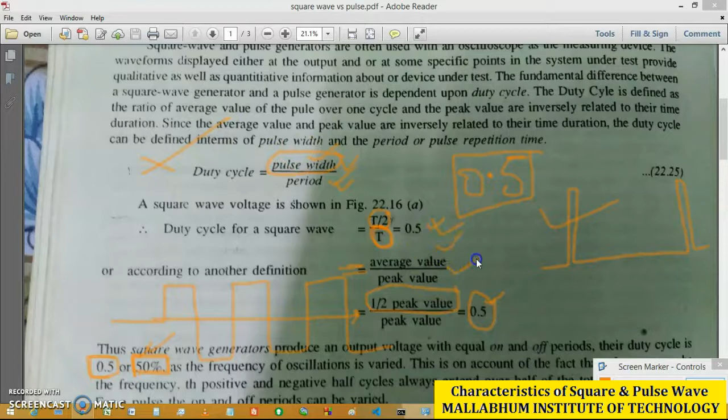So the foremost thing here is that the duty cycle is defined in two ways. First of all, it is defined by the pulse width divided by total period, and it is also defined in an indirect way, that is the average value by the peak value. This is the most uncommon expression of the duty cycle.

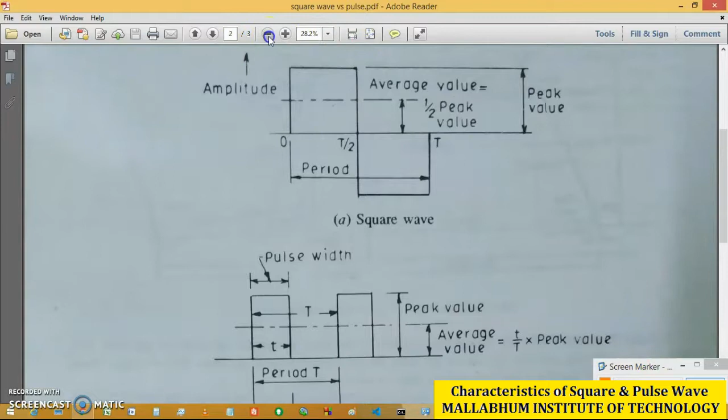In the next page you can see the two waveforms. I can zoom out so that you can see very easily. One minute. Okay, so here you can see the waveforms of these two: the first one is the square wave, and the second one is a pulse.

Now in the case of the square wave, you can see that this is the square wave. Here you can easily see the peak value and the average value. This is the average value for the square wave, and it is expressed as half of the peak value. That means whatever the peak value may be, the average value is half of the peak value, but the base, that is the reference level, is 0.

Okay, so this is the positive half cycle, and this is the negative half cycle. In the case of the square wave, this is the positive half cycle and this is the negative half cycle. It does not mean that the total value of this waveform is zero just because one part is positive and the other is negative. It is not happening like that.

The amplitude and time are multiplied in the most common way, and it is integrated over the period. That total value is then divided by T. From that expression we can calculate the average value of any waveform. You can see this expression in the Signals and Systems course in your syllabus.

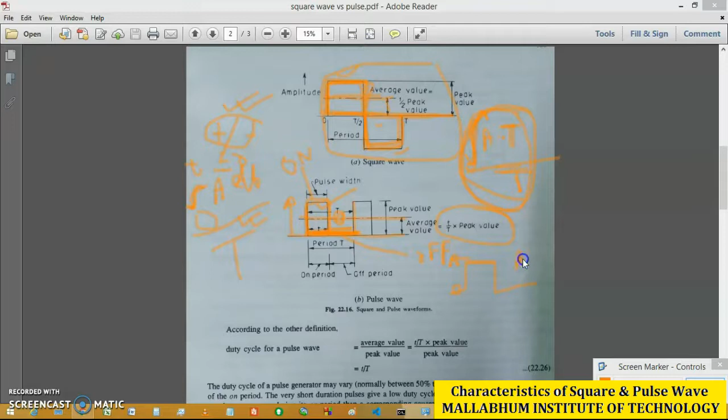So the average value is calculated like that. This is your waveform, this is your zero, this is your A, so it is not that the average value is A by 2. The average value is calculated by a mathematical expression, and this is that mathematical expression.

So I am again repeating: the total area is first calculated, then it is divided by the total time period. That's why the average value for a pulse is t by T into peak value.

It means whenever you calculate the area, the zero value portion is not accounted for because it has area zero and amplitude zero. But whatever value it holds during the on period, that duration is t, so that's why it is t by T into peak value. I hope you get that.

You will find this expression in your Signals and Systems course. The calculation of the average value of any particular signal, you can find it very easily.

Next, the duty cycle of the pulse is another definition, which I have said is the indirect definition: average value by the peak value. So the average value to peak value ratio is t by T.

Now the duty cycle of a pulse may be varied between 50% to 95%, whatever may be our requirement according to the application of this pulse. For that purpose we define the on period of the pulse, and from that we can say that the duty cycle varies between 50 to 95%. But in the case of the square wave it is always 50%, because whatever value you calculate, that value is always 0.5.

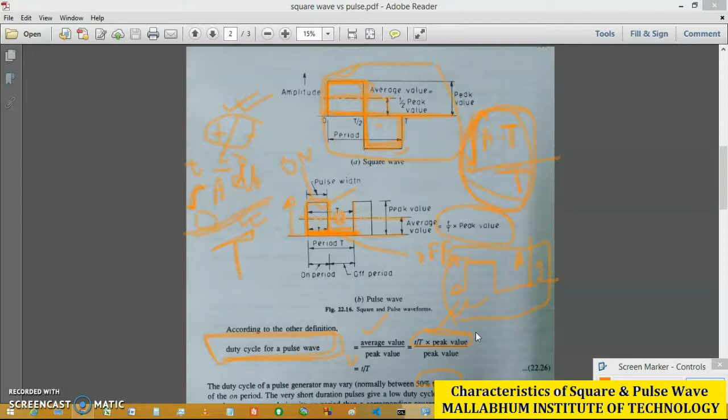Next, we will discuss some of the characteristics of the pulse.

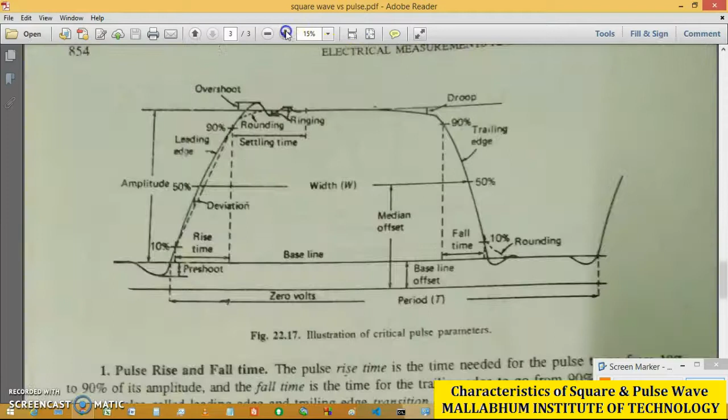First of all, you can see that this is the actual waveform of a pulse. Now from this actual waveform, there are different characteristics or terminology associated with this pulse waveform. You can see this is your amplitude, this is your preshoot time, this is your rise time, this is your settling time. In your network course you will find this term. This is your baseline, this is 0 volt, this is base offset, this is rounding, this is fall time, this is median offset, this is trailing edge, this is droop, this is overshoot. You will find the term overshoot in your network course.

The first term is your pulse rise time and fall time. Rise time is defined by the pulse going from 10% to 90% of its amplitude, and the fall time is just the reverse of that. Whatever time is required for the pulse to go from 10% to 90%, that is defined by rise time, and whatever time it takes to go from 90% to 10% of its amplitude value, that is defined by fall time.

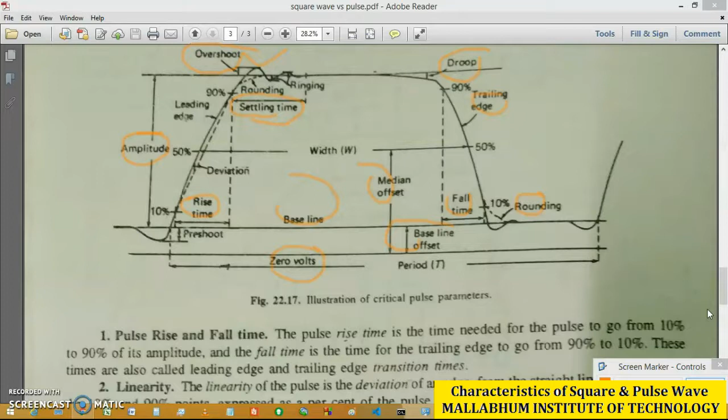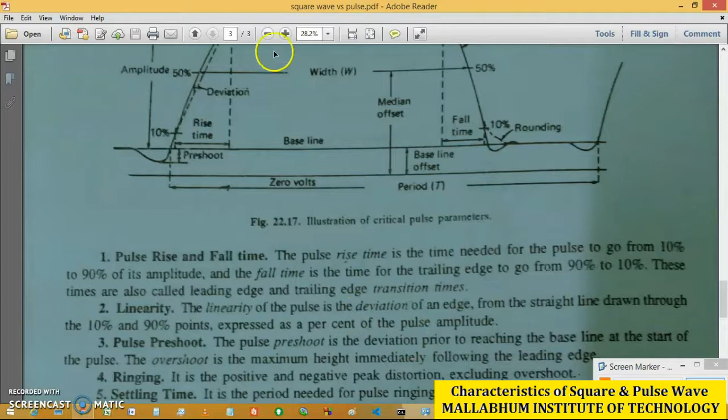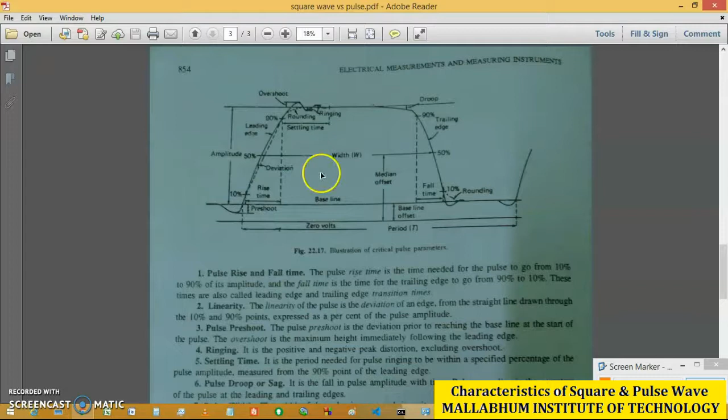Next is your linearity. Linearity of the pulse is the deviation from an edge, that means from the straight line. This is the actual pulse waveform, but that is not always the case from a practical purpose. So whatever value deviates from that straight line, that is the expression of your linearity.

Next is the pulse droop. It is the fall in amplitude with time, and the pulse rounding is the curvature of the pulse at the leading and trailing edge. This is your trailing edge and this is your leading edge. So that is defined by pulse rounding. There are different sorts of characteristics.

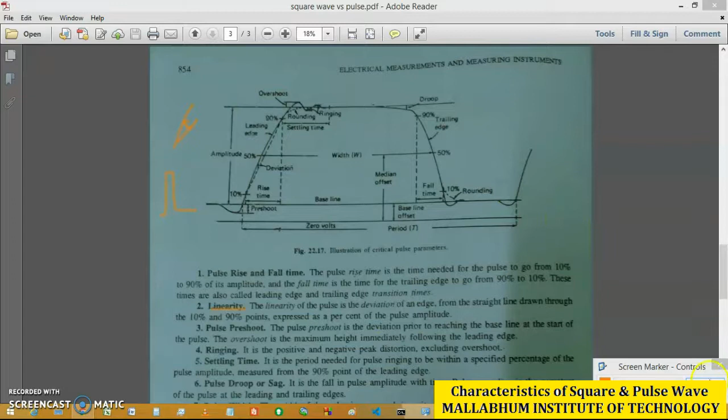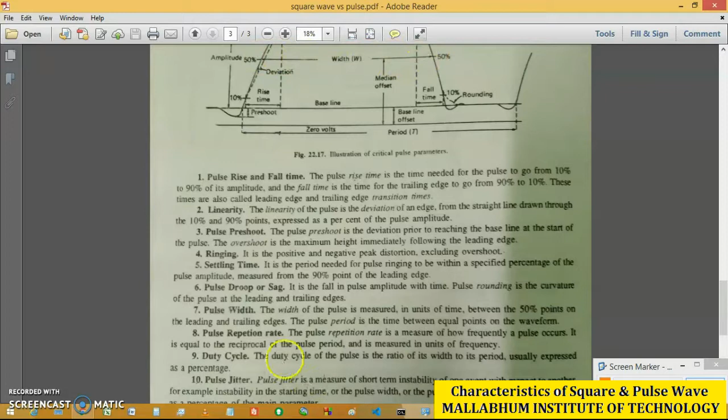So pulse width is defined by whatever may be the width of this pulse, as you can see here. Duty cycle, I have already defined. Not all terms are equally important, but some important ones are pulse rise time and fall time. Linearity is also important, that is the deviation from the actual pulse. Settling time is also important, which excludes the overshoot.

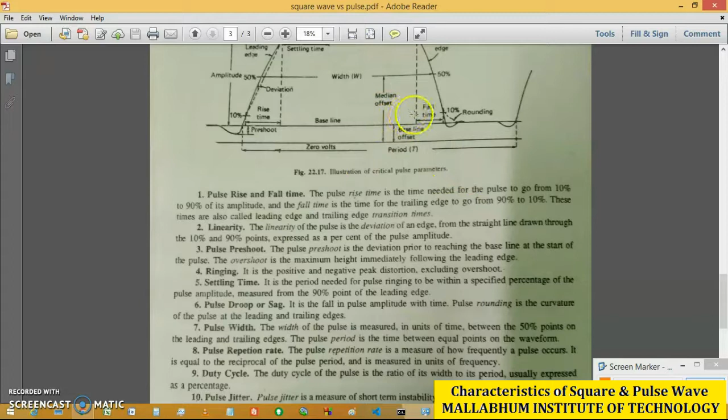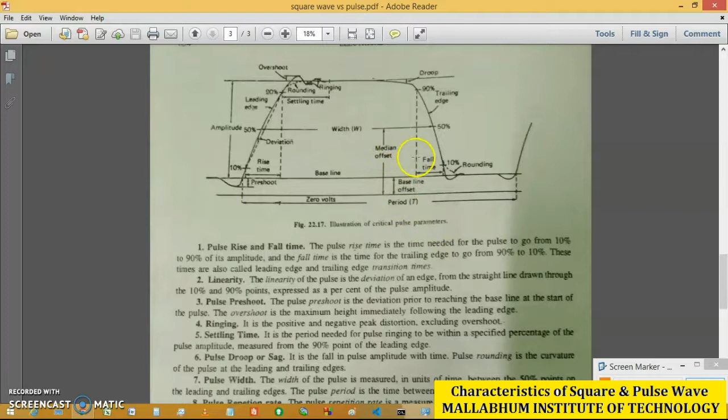Maximum height immediately following the leading edge is also called the overshoot value. This is your overshoot, you can see that this is your overshoot value. This is your baseline offset. So that's all. You can see the waveform very accurately, and you will see different characteristics. It is very straightforward. Next we will discuss the block diagram arrangement of the pulse wave generator.